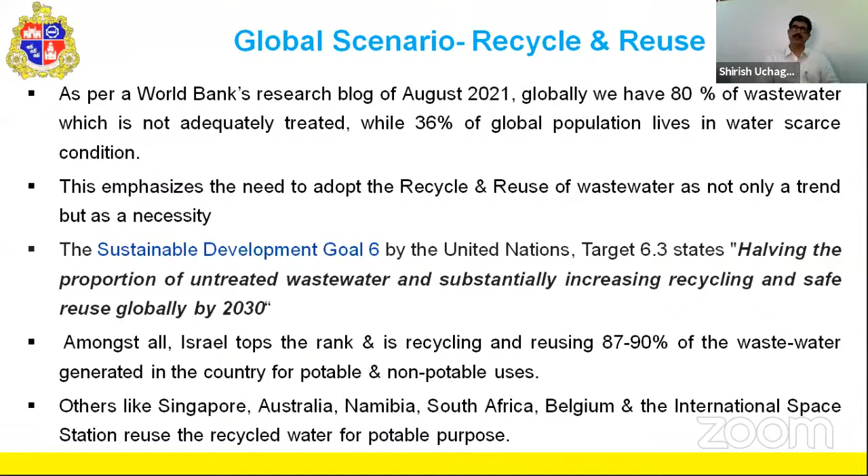While being on the subject for Mumbai, you may be aware that the population of Mumbai is around 14.08 million, and that's a major challenge that we need to tackle while speaking about recycling and reuse of treated sewage here.

The area Mumbai encompasses is about 438 square kilometers, and the water supply as of today is 3850 MLD at source. Now, deducting the supply given to, say, Thane Municipal Corporation as well as Bhiwandi Nagar Parishad and those areas...

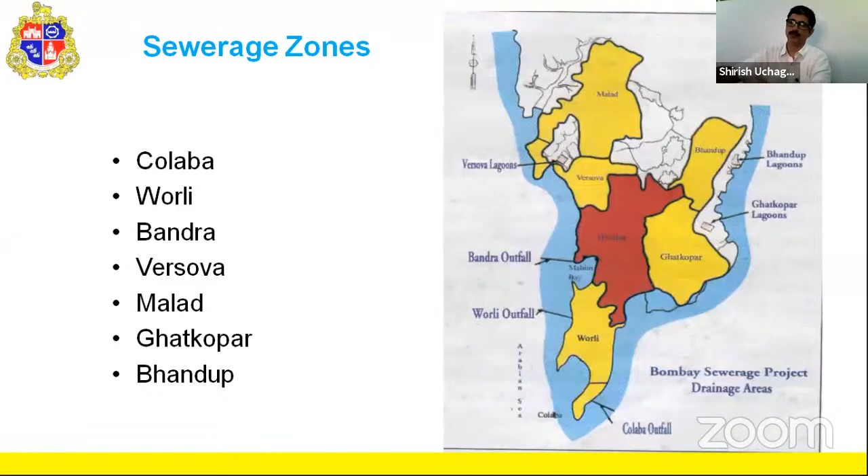Recently completed Colaba treatment plant has tertiary treatment facilities also, but since there is no user available immediately, the treated water is let into the sea after secondary treatment.

Of course, Navy has shown interest for buying this tertiary treated water from Colaba, but not to the fullest extent.

So we intend to reuse the treated water from wastewater treatment facilities in Mumbai, and through our department named Mumbai Sewage Disposal Project, we have invited tenders for upgradation of all these 7 treatment facilities, so that the treatment effluent discharge standards of NGT are met on completion of these treatment plants.

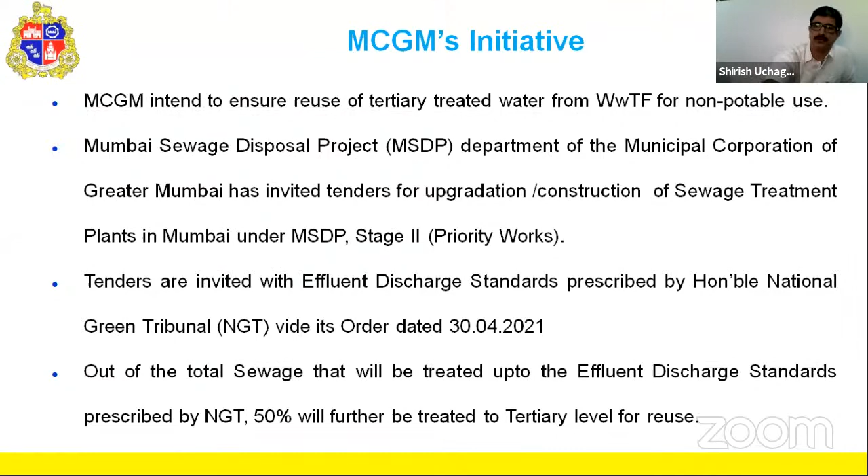The 7 treatment plants which I was discussing about earlier - Colaba is commissioned in April 2020. The other treatment plants which are going to come up have total capacity of about 2,501 MLD, out of which 50% of the water is going to be recycled and reused.

This additional water available after completion of these treatment plants will be treated at new discharge standards mandated by NGT. The bids invited encompass technology that is open to all — we have not specified any particular type of technology for treatment of sewage. All contracts are going to be of DBO type with O&M for 15 years, with due asset replacement after a specified time.

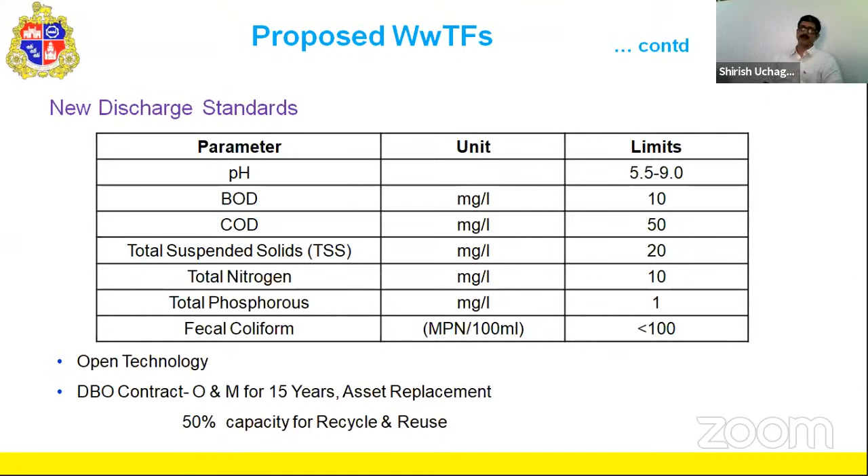Going back to the previous slide, you can see fecal coliforms indicated as less than 100 — that is after secondary treatment. But after tertiary treatment, they are going to be below detectable level. Then only that water is going to be used for non-potable purposes.

Now, about the non-potable uses of recycled water. We are exploring all these options where this can really be used, and the non-potable options could be industrial purpose, gardening, or charging of fire hydrants. This is one of the important uses which can be thought of, like charging of fire hydrants, railway or bus washing, or toilet flushing.

But for some of the uses, like toilet flushing given by commercial establishments or even domestic and residential establishments, we need to have some legislative support for that.

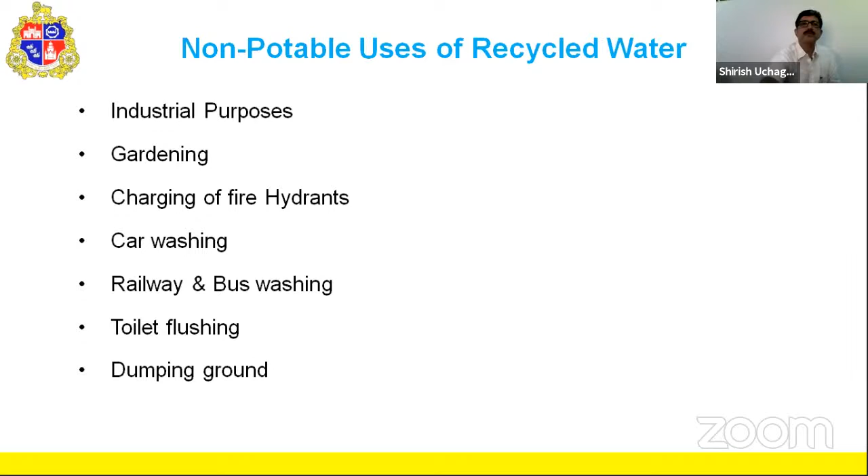We actually have some of these facilities erected at 8 locations where, with different technologies, we have been reusing treated sewage. Like from our Love Grove sewage treatment plant at Worli, by deploying the IIT soil biotechnology technique, we are using it for gardening purpose.

Now, the Banganga pumping station, which is based on rotating media biofilter technology, is administering the gardens of Raj Bhavan. Similarly, Bandra, Dadar, Charkop, and Colaba, though working with different technologies for treating sewage water, are being used for different purposes, primarily for gardening.

These are some of the challenges basically faced while framing policy on reuse of recycled water. First is maintenance of tertiary treatment facilities. This requires facility for tertiary treatment, not only from a capex point of view, but also for storage and delivery. It requires huge cost, and further, maintenance cost for ensuring proper water quality is also an issue while recycling treated sewage.

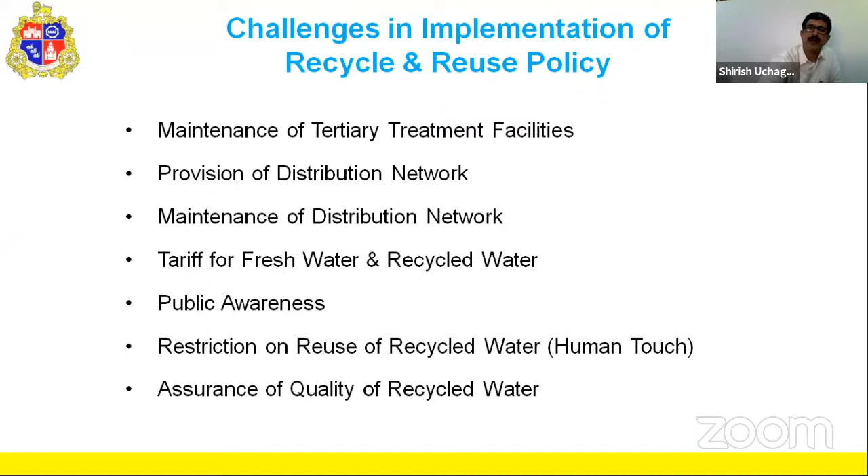Then we have another issue — tariff for fresh water versus recycled water. The most important part is public awareness. There will obviously be social stigma around using this water, so we need to conduct public awareness programs, along with legislative support and some mandatory marketing techniques.

So when these treatment plants were designed for treating wastewater at these 7 or 8 locations, what were the expected achievements of these projects? First was conservation of environment, because this will definitely help in reducing dependence on development of surface water sources. This will be a very reliable local source, not vulnerable to droughts or climate change constraints, so this has to be pushed further.

Secondly, it will also improve sea aquatic life, because we are letting our sewage — maybe preliminary treated sewage — through sewage outfalls into the sea. If it is treated fully and the water is reused, it will definitely improve sea aquatic life due to reduced pollution. This will also improve air quality as well as public health in Mumbai city.

But in spite of all this, we are facing multiple challenges while planning these wastewater treatment projects for such a mega city, and it is necessary to have a site-specific approach. If we are planning localized use of treated sewage, maybe after tertiary treatment, we need a localized network available for conveying, distributing, and storing that water at different locations.

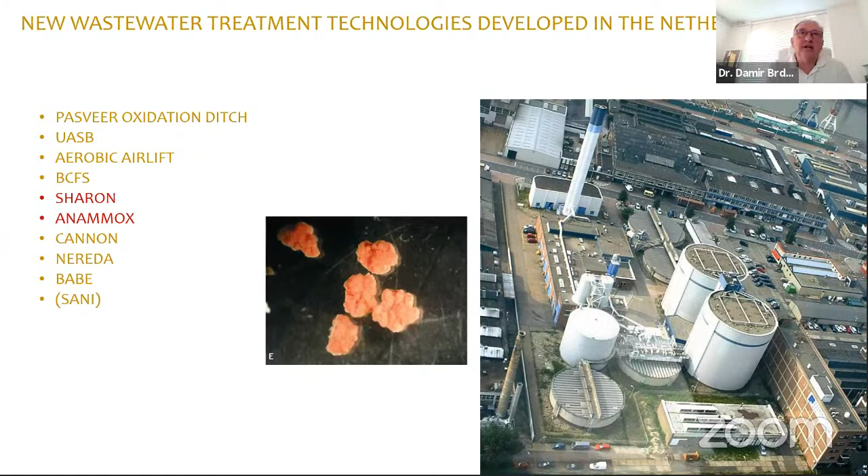So the innovation in that area was really pushed by Dutch wastewater practice and supported by the Dutch organization, the Dutch Association for Research in Wastewater, called STOWA. Such research was also behind the developments on aerobic granular sludge.

So now I'm not talking about anaerobic granular sludge, I'm talking about aerobic granular sludge, which was commercially patented and called Nereda, also available from one Dutch company. Nowadays there are more than 40 or 50 treatment plants in the world applying this process. The secret is the morphology of the microorganisms, which cluster in the form of granules.

Further on, there is also a process developed in Delft, but not necessarily globally applied. It's called BABE, which stands for bioaugmentation batch enhanced process. All these processes I mentioned - BCFS, Sharon, Anammox, Cannon, Nereda, and BABE - were co-developed at Delft University of Technology with Professor Mark van Loosdrecht behind them, along with a bigger team which often includes Dutch practice, Dutch water boards, and Dutch industry.

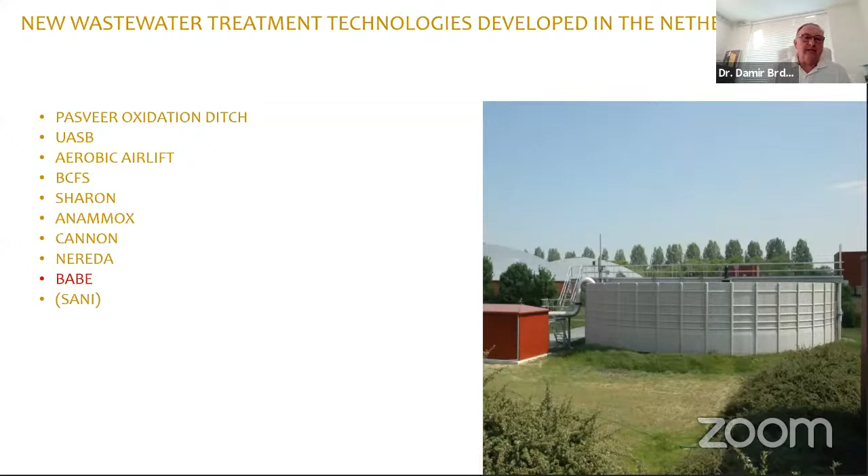The last wastewater treatment innovation from the Netherlands on my list is called SANI, which stands for Sulfate reduction Autotrophic Denitrification and Nitrification integrated. This means treatment of wastewater using sulfate present in the wastewater. I put it in brackets because the Dutch were heavily involved in this research, but the major developments were done in Hong Kong, China, where seawater is used for toilet flushing, which is why sulfate became important in treatment there.

Next to wastewater treatment, in the Netherlands we are very interested in resource recovery. We don't see wastewater as waste, but as a resource, and numerous systems have been developed to recover struvite from wastewater, specifically from urine. It's important that urine is separated from feces so we can efficiently recover struvite, which can later be used as a manure fertilizer for agriculture.

A lot of research in the Netherlands is happening in the area of bioplastics, and one example is the production of bioplastics from microorganisms in the form of PHA, which stands for polyhydroxyalkanoate. That is a booming industry.

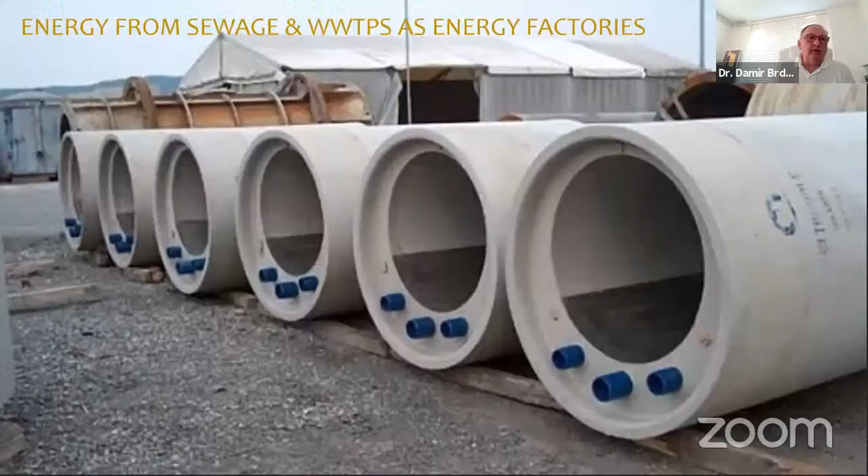As we heard earlier in Paul's introduction, energy recuperation from sewage is very important, and we have some examples in the Netherlands. In the last 10 years there's a new trend called wastewater treatment plants as energy factories. You may have also heard in a previous presentation that some wastewater treatment plants are energy neutral, and many recover enough energy to at least cover their aeration needs.

All of what I've said about the future of wastewater treatment plants, Professor van Loosdrecht and I put into a short article published in Science, and you can read more there if you're interested in this topic.

Now I'd like to move into the second part of my presentation, which deals with non-sewer sanitation: fecal sludge management, or as we discuss in India, is it fecal sludge or septic sludge? Don't worry, it's about non-sewer sanitation, fecal sludge treatment, and septic sludge treatment.

A big role in this development globally was played, and is still being played, by Bill Gates and the Bill and Melinda Gates Foundation, who launched an event called the Reinvent the Toilet Fair. Our King of the Netherlands, His Royal Highness, also joined this event, and I was there personally as an invited guest with wonderful chats. That event triggered the development of many new technologies for non-sewer sanitation.

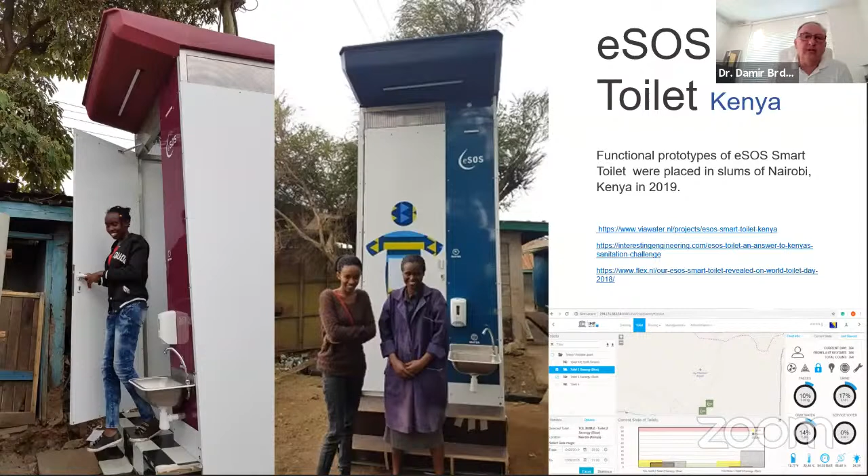So some results from this research inspired me and my team to think about how the toilets can be used for medical purposes. We wanted to merge sanitation development with medical technologies. So how could we use the toilets to detect diseases, not to diagnose, not to replace the role of the doctor, but to give a preliminary diagnosis of potential patients for several diseases.

And we developed a Mediloo toilet, one version of which is like this, which is actually a beautiful breakthrough technology still under development, and can be applied for detection, hopefully for at least a dozen different diseases happening in developing countries. Next to that, we also developed a concept called Mediloo Bathroom, which will bring these innovations also for the rich, because we are all people and we all need early detection.

So we are developing innovations from the mirror, where we have different technologies, from the smart toothbrush to the weight balance which is under the toilet and going into the toilet bowl. And we have technology and sensors everywhere, and they are all non-invasive. That's very important. So the approach here is to use technologies which are available and adapted to these innovations.

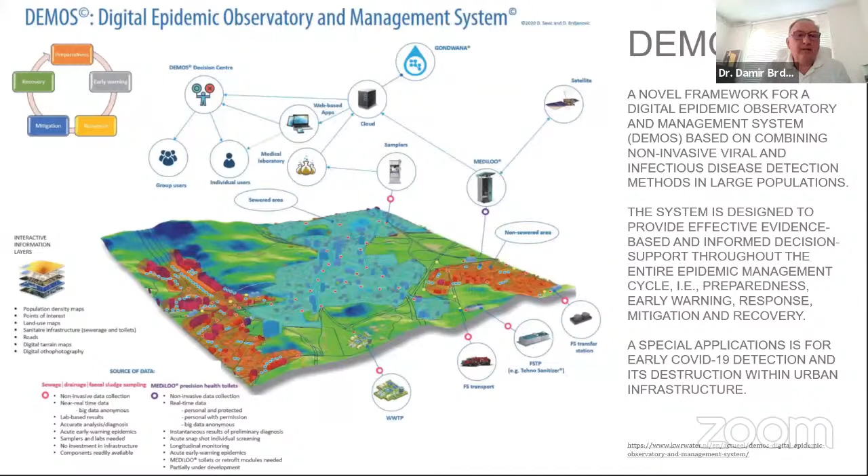And we are developing this in this direction very, very fast at the moment.

So the last part is about education. It will take me 2 minutes, please. It's about something extremely important, because these technologies that I showed you, where the Netherlands is paving the way already for decades, and is recognized as one of the most fertile countries in the world concerning wastewater, and nowadays also non-sewer sanitation, requires also people.

About 10 years ago, my institution, IHE Delft, put tremendous effort into improving our mission regarding sanitation. In this journey, the Bill and Melinda Gates Foundation helped us tremendously. With their help, we established a global sanitation graduate school.

This is the world's largest mechanism for capacity development in CWIS, citywide inclusive sanitation. At this moment, we are focusing on Sub-Saharan Africa and Southeast Asia.

What is the Global Sanitation Graduate School? It's actually an organization, a platform which takes as its basis the Delft-based new master's program on non-sewer sanitation that we developed in cooperation with 150 global experts on sanitation.

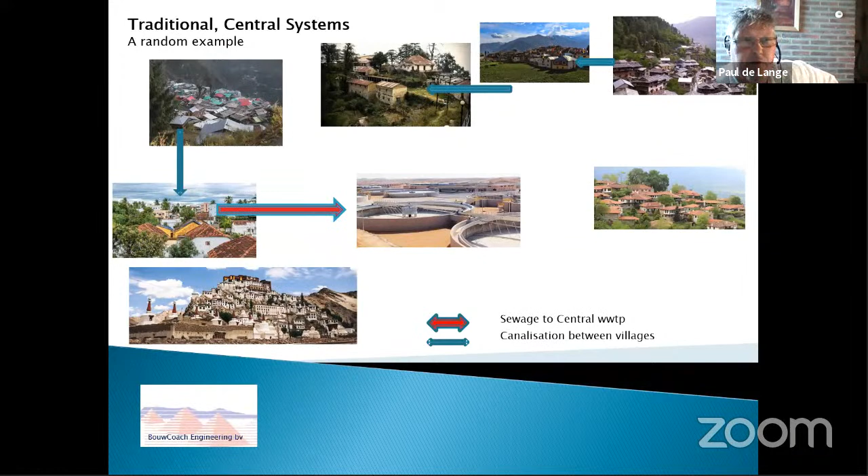Okay, this is my first sheet, just explaining a little bit - all of you know how traditional central systems work, and after that I will tell you about decentral systems. Let's see if the slide is working. Yes, okay. This is very logical how central systems work: you go from city to city with piping, ending up in a central wastewater treatment system.

It has some disadvantages. You need a lot of time to design - it's custom made, you need to design the piping and the wastewater treatment plant. Also, these plants only work well when 80% of the designed capacity is really going to that plant. When you're in a developing area, it can take years, so it won't work. Of course, in operational costs you also have pumping costs, energy costs, and all that piping, which is expensive to build. In a country like the Netherlands, we usually take 200 euros per meter of transport pipe - calculate what 10, 20, 50 kilometers will cost.

On the other hand, we have the decentral solutions. Here you see the same villages, but in every village you make a local plant. This way you avoid all the designing costs and piping costs and piping design costs, and you don't have a central solution anymore. A further advantage is you can locally reuse the effluent - you're not down the mountain, you're on the mountain.

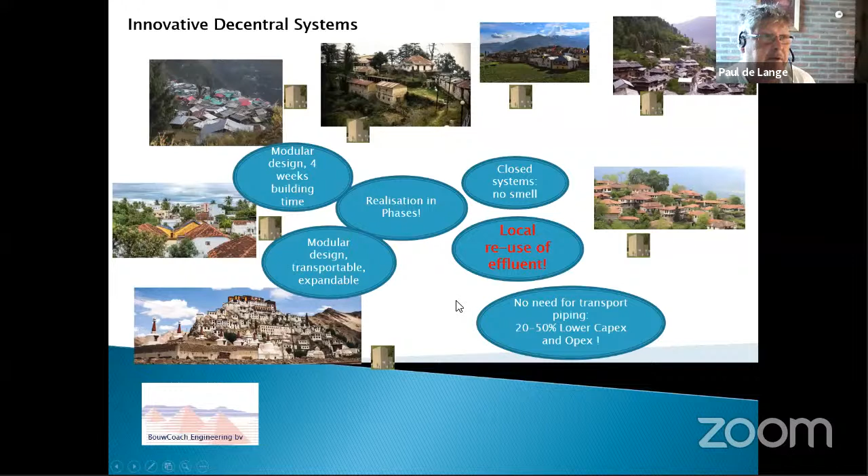One very interesting thing: one of the former speakers showed figures for what the effluent needs to be. When I quickly checked, I saw that our test results on the modular standard units are even much more below the minimum requirement, and even matching the reuse requirements. And that is even without the last part that we introduced in our systems.

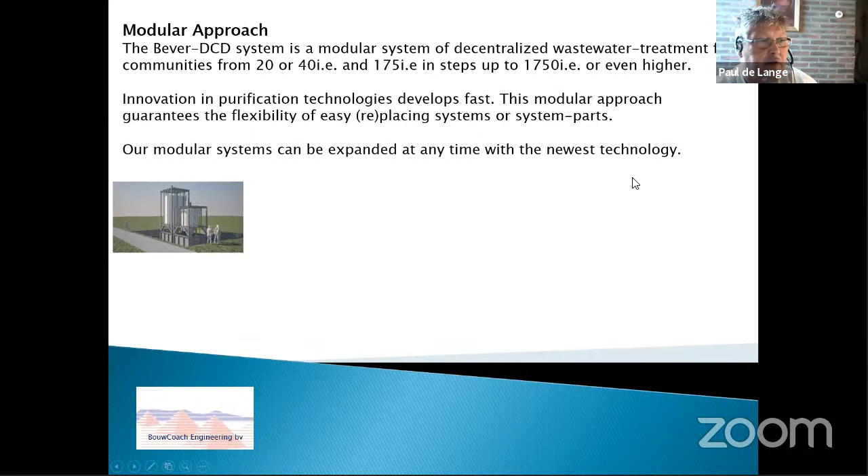Here you have some pictures, just examples, but you see the biggest tower is 175 IE. And that's the measurement of one modular size. And of course you can put a lot of them together. By the way, the surface of one element is about 4 by 4 meters.

So you can put them almost anywhere you want because they don't need a lot of space, due to the integration of the influent buffers and the sludge buffers. They're all in the cellars. So it doesn't need much space.

And for the very fast and small places, we have the modular container units. They are 20 or 40 inhabitant equivalents.

As you also can see, and it was mentioned before, that is the odor question. Well, as you can see, these are closed tanks, and the odor is very much controlled. And even with the second layer around it, the small building, you hardly have odor nuisance.

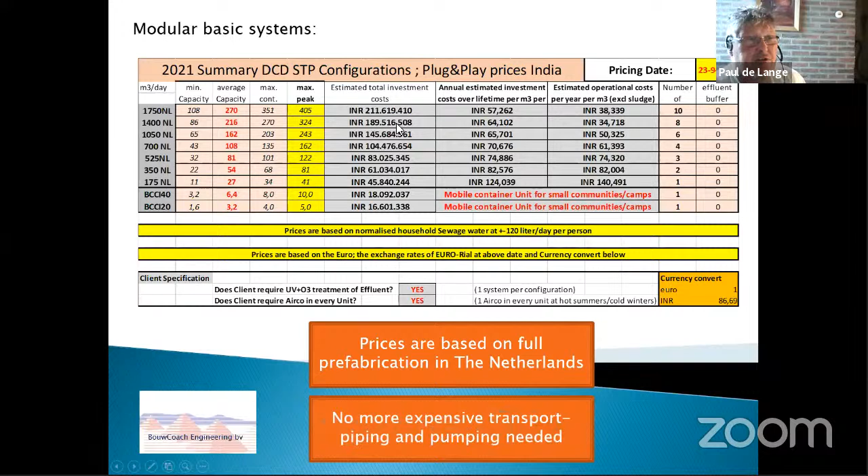Of course, this is a very important part, and that is: how much does it cost? Okay, we have the estimated costs here, and of course they are not fixed. But what you see here is fully prefabbed in Holland, transported to India, and erected on site. And there are a lot of alternatives for that.

We can make some parts in India, but also you see here the UV ozonification treatment is included. An aircon in every unit is included, that's only needed when the average temperatures go above 25 degrees. So, let's say, this is plug and play, usable everywhere in the world, giving very clean, almost potable effluent.

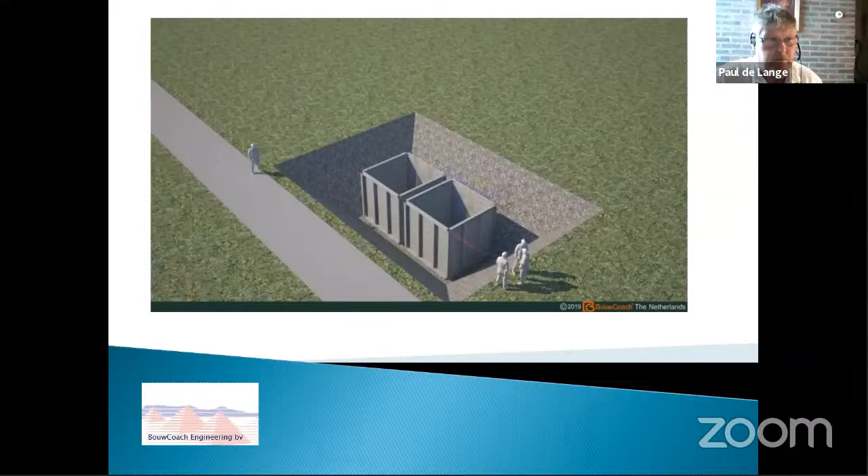Next, I will show you a small animation. This is the basis, to give you an idea how simple it is to place those elements everywhere you want. In this example you see it's in the ground, but as I said before, it's also possible to put them half in the ground or even totally above the ground. The only thing you need to do is fill the surroundings with sand, because when the tanks are empty and there is a storm, we don't want the towers to fall down. That's the only reason for it.

This is an impression. One of those tanks is the influent tank, and the other is the sludge tank, and they collect.

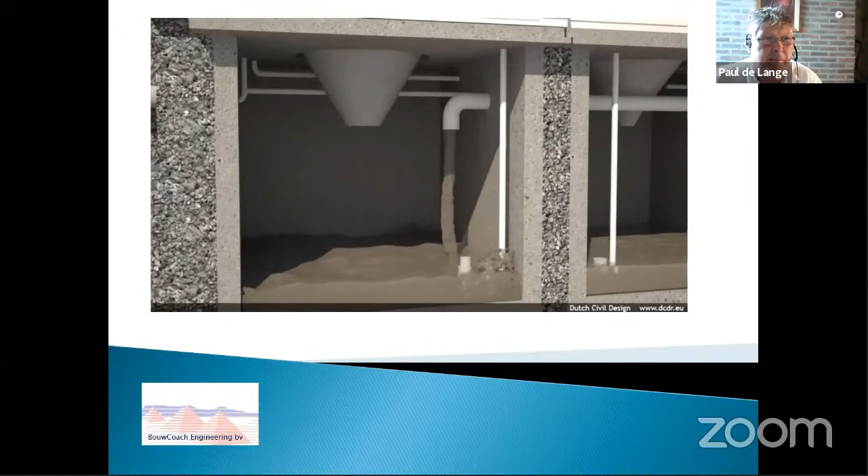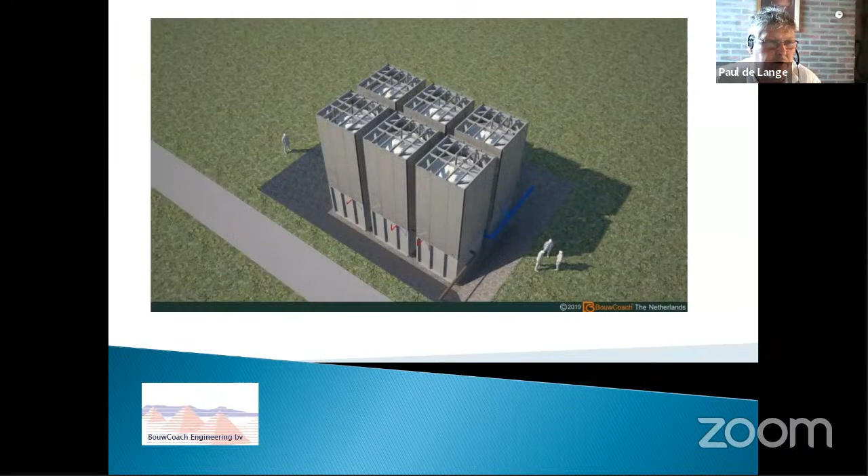Our systems are controlled and monitored by telemetry. Here in the Netherlands we have an office where all the data from the world comes in, and we can see if something is malfunctioning. Sometimes we can correct it from our Dutch base, and sometimes we need to send a maintenance engineer who can be instructed and can work for a regional water company.

Again, these towers are only 4 by 4 meters, so it's no problem to put them in suburbs, small villages, or in cities next to a building complex. So you can do your wastewater treatment very locally.

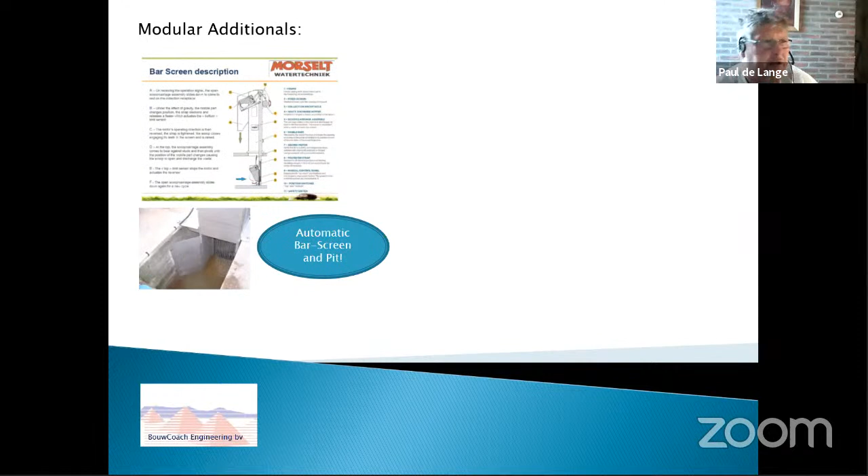We have some additionals. Of course, we don't know what quality or pollution is in the incoming water, so you can add an automatic bar screen. Also, if you have a remote area with a lot of those installations, we have a mobile dewatering unit, so you can take the sludge out, dewater it, put the water back into the system, and take the thickened sludge to a place where it will be processed. And what I mentioned before, already included, is the UV and ozonification disinfection unit.

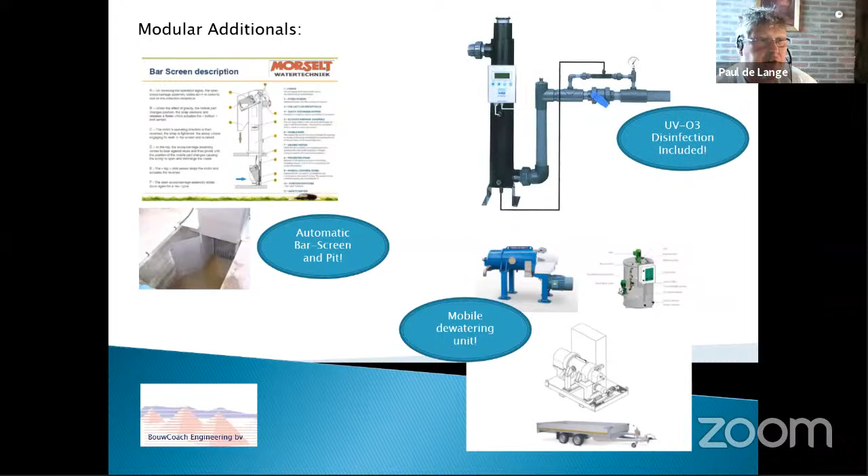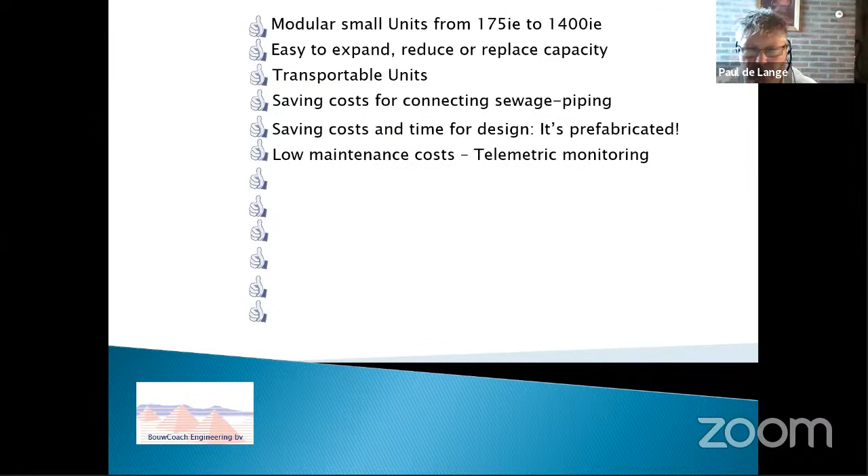Very quickly, I will not read all of them, but I'm sure you can read them afterwards. These are all the advantages in a row, and of course everything depends a lot on the prices. But always remember, if you want to start up a sanitation project, always look at the decentral solution before you go designing a big plant or a big transport system.

I'm very willing to give a quick price to anyone who wants to do some investigations or a feasibility study, because I'm very convinced that in many cases these systems are much more logical. And of course it's proven technology—you don't have to reinvent a custom-made, custom-designed central solution every time. It's proven technology and it's Dutch quality.

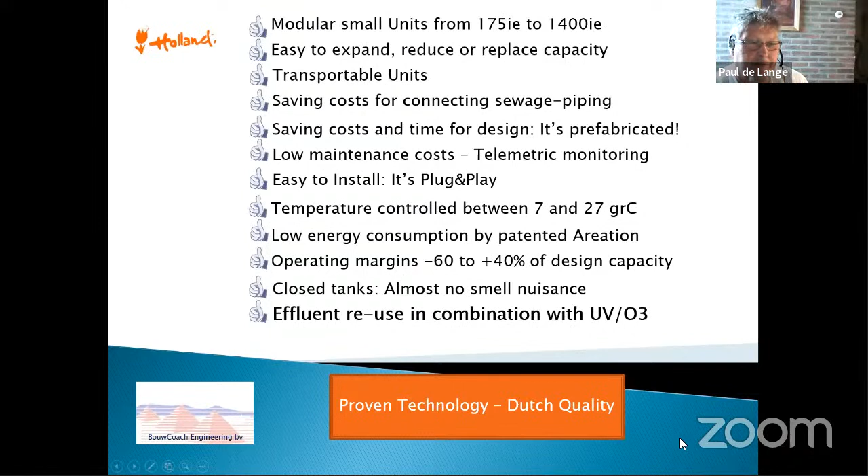And the question is, can you think differently and in your first plans already introduce these decentral solutions? If anyone has questions, please go ahead.

So Paul, we do have some questions for you. One, Prajakta Malve is asking: what is the capacity of these modular units? Can it handle the large quantities of wastewater that Indian cities generate?

I will go back to one of the pictures here. I hope everybody can see—or is it out? No, it's out, but okay, I'll share it again. Can you see now? Yes, I think so.

Here you can see the modularity. So this one tower is 175, and the average capacity is 27 cubic meters a day, maximum continuous 34, and we can handle a peak of 41 cubic meters. What you do is find the right amount of units to fulfill your needs. So a 1750 installation, that's 10 times the 175, has a peak maximum of 405 cubic meters a day. Of course you can double, triple, or multiply it by 10, but at a certain point you are going into a central solution, because that will be cheaper. It's basically as simple as that.

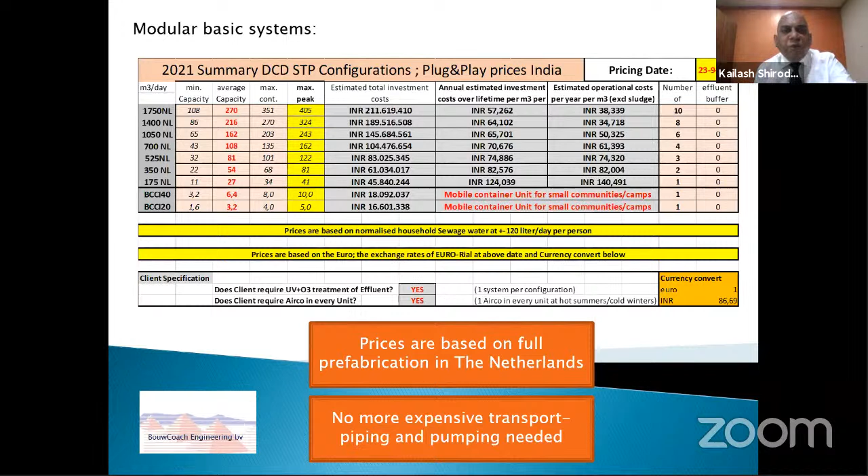So 2 or 3 viewers have asked this question, Paul: what technique or method have you used to calculate total nitrogen in the wastewater?

It was not a calculation. Of course we have calculations, but they are based on laboratory results. So we have three things: the calculations that were the basis, the laboratory measurements, and the in-practice measurements—and they fit together.

Yes, so with a pre-designed, proven technology, you can very much say what the performance will be. But I need to say, of course, you need to have a basis for your influent. If you have very polluted water with industrial components, you have to recalculate, and you have to see, okay, maybe we have to make it bigger than just with household wastewater. But basically, no.

If we know the amount of cubic meters a day, if we know how the influent is polluted with normal house water, or is there a lot of salt from factories, then it will be difficult. But we can give you an indication what it will cost, and we can give it within a few days. So I invite everybody who is interested, just mail me, and I'll make you a price indication.

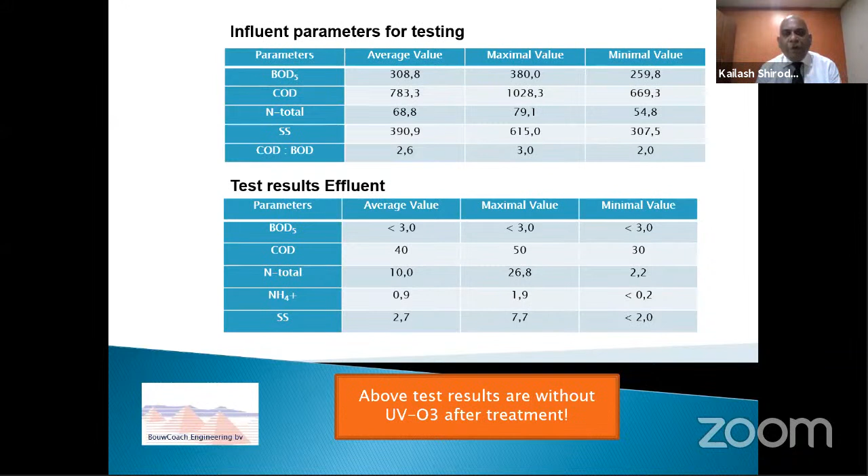Thank you, Paul. So moving on, like I shared with you, we are going to have in the next part of the webinar today, interesting case studies, both from the Dutch as well as India. So moving to our next presentation, I would now like to invite Mr. Davy Ringroot. He's going to be talking about case studies from Dutch utilities on the wastewater side, so specifically for the cities of Tilburg and Hengelo. So over to you, Davy.

Thank you, Kailash, and good afternoon, everyone. It's my pleasure to present on sludge treatment in the Netherlands and to present also some case studies from two projects that were realized in the Netherlands. Can you confirm you can see the screen, please, Kailash? Yes, we can. Very good, then here we go.

So I will present today a bit on the structure of the Dutch water market and very specifically on the role of the waterschappen, or water authorities, which is very typical for the Netherlands. And then I also will explain how sludge management is organized in the Netherlands. And then finally, I will present two case studies that were built in the Netherlands as an example of sludge management. And then I will also present some final conclusions.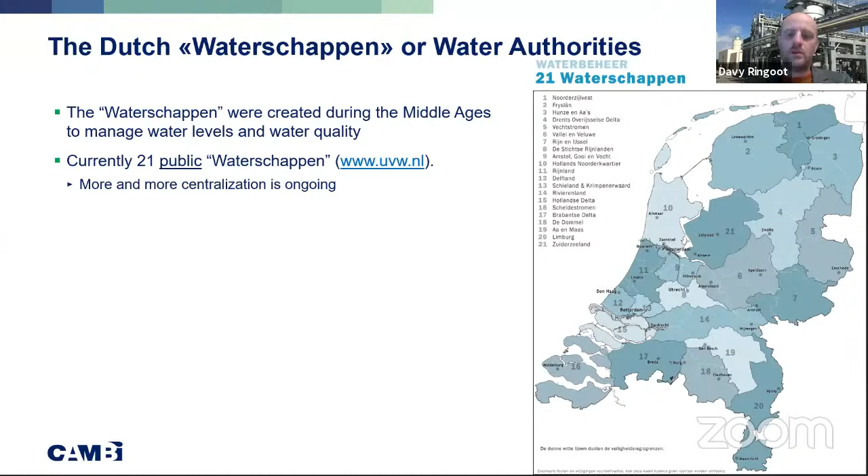What is very specific is that these are public organizations. So the water is managed through public organizations, but not in municipalities, in organizations that are much bigger than local municipalities. So all in all, in the Netherlands, these waterschappen manage water for approximately 17 million people. That's the amount of inhabitants in the Netherlands, although that is probably less than the whole of Mumbai, I understand.

In total, the waterschappen own and operate approximately a bit over 300 large wastewater treatment plants. They treat about 2 billion cubic meters of wastewater per year. They also manage other aspects of water, but I will not focus on that today. What is really important is that these waterschappen have a very big focus on innovation, and that is, I think, one of the key drivers for the success of the Dutch water sector.

Professor Damir presented a lot of innovations in the Netherlands, and I think that many of these innovations have seen the light thanks to this innovative way of organizing tenders and projects by the end customers, which are the public water authorities. They also have defined within the 21 water authorities the goal to become energy neutral in 2025, and that has actually stimulated a lot of new ideas and new projects.

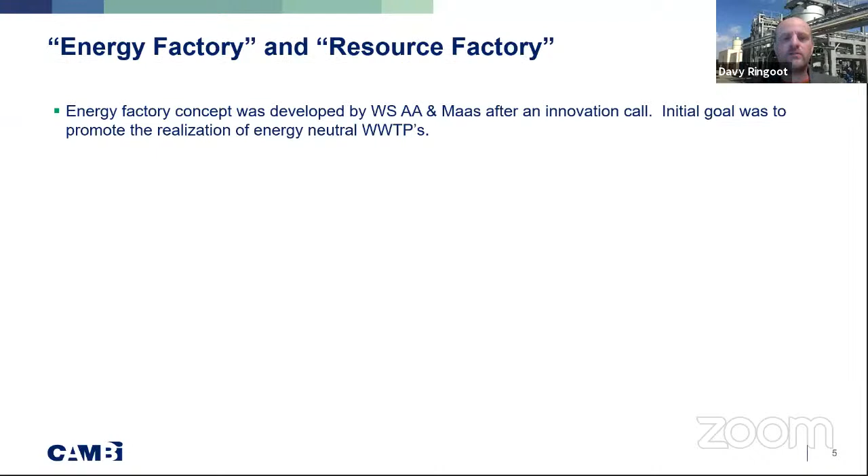Several other water authorities signed up for the idea, but it was also expanded, not just recovering energy, but also recovering a lot of additional resources, such as cellulose and phosphate. Struvite was presented also earlier today, but today there are also plants that recover CO2 and supply it from a wastewater treatment plant to one of the greenhouses in the Netherlands. Kaumera is a kind of biochemical that is recovered from Nereda sludge. So there is a lot of ideas and projects to recover energy and resources from water and sludge, and I'm presenting some results.

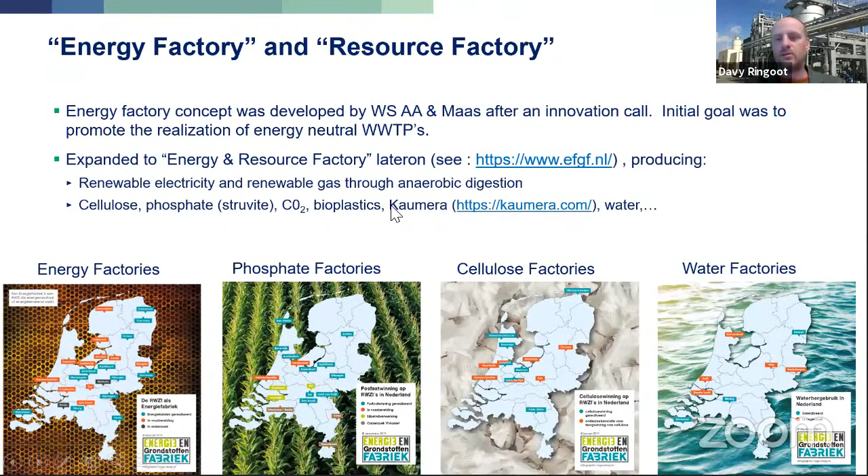This is kind of an overview in these graphs of all the different energy factories that are being built and developed in the Netherlands. You also have phosphate factories, cellulose factories, water factories, etc. So a huge amount of activity in the Netherlands. If you want to see details on all these projects, I recommend you visit the site of the Energy and Resource Factory project, which I've given the link here, and you will find all details on those projects.

So some words on sludge management in the Netherlands. As I said, there's approximately 17 million people in the Netherlands, and the total volume of sludge generated by these 17 million people, knowing that almost all sewage in the Netherlands is collected and treated, so there is a very high degree of connection and treatment. Overall, there is approximately 1.4 million tons of dewatered sewage cake that is being produced from the individual wastewater treatment plants. This is mostly digested sludge.

So these amounts are after digestion. These are the amounts that are sent to some kind of final disposal. And in the 1.4 million tons of wet cake, this is the water cake, it represents approximately 320,000 tons of dry solids per year that are disposed.

In terms of disposal, all the sludge in the Netherlands is disposed through some kind of incineration. Actually, the law is written in a way that sludge has to be incinerated. So there is no allowance, for instance, for composting of sludge or land application. This is driven by a number of reasons, but I think one of the main reasons is that in the Netherlands, or actually in the whole Benelux region, the whole area is already overloaded with nutrients. So we have very high levels of phosphorus in the soil and in the groundwater, and our governments are trying to reduce the amount of nutrients that are being put on land.

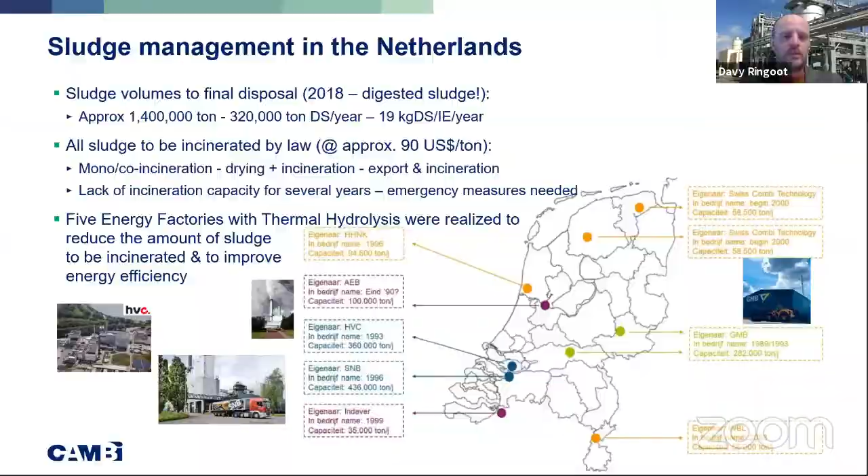So first one is the energy factory in Hengelo. Hengelo is a plant owned by the Waterschap Vechtstromen, on the eastern side of the Netherlands, close to the German border. The water authority manages water for approximately 800,000 people equivalent.

The business case of the Hengelo plant was to realize one centralized sludge treatment facility for all the sludge in the region. Historically this water authority had different sites, but they decided to centralize everything at Hengelo. Hengelo is a 200,000 people equivalent wastewater treatment plant, but it now treats the sludge for 800,000 people equivalent, which allowed them to maximize the existing assets.

At the bottom of the picture you see three large egg-shaped digesters, and by retrofitting them with thermal hydrolysis, the capacity of these digesters can be tripled, which allowed the plant to realize this centralized sludge treatment facility. It also allowed them to shut down one of the other digester plants at Enschede, which without this project would have required a complete rebuild and refurbishment. So they saved some money in the refurbishment.

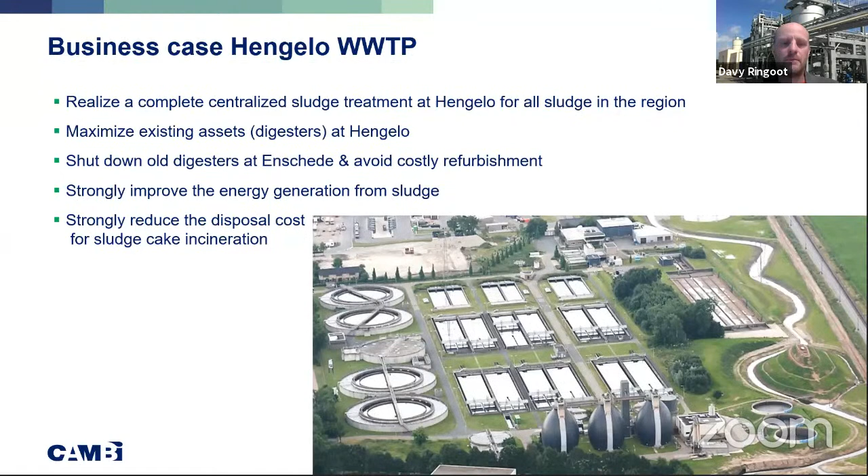In terms of solution, a centralized sludge treatment facility was built for approximately 18,000 tons of dry solids per year. About 25 to 30 percent of this is primary sludge, the rest is biological sludge. A Cambi thermal hydrolysis system was installed on site with all the ancillaries. What's interesting to mention is that this was contracted directly between the Waterschap and the technology supplier based on an open negotiation tender. Again, the goal was to maximize the use of the existing assets, the large digesters.

Two megawatts of renewable electricity generation was installed through three cogeneration engines. The dewatering was strongly improved by application of the thermal hydrolysis, dewatering now to above 30%. Also, one Anammox system was added to manage the reject water treatment from the sludge digestion.

So on the bottom picture you see the plant as it's been realized today. From right to left, you can see a building with the pre-dewatering machinery. Then there is a thermal hydrolysis plant with two hydrolysis reactors, a building with the boiler infrastructure, and finally three gas engines to produce electricity. You see the gas balloon and the flare, and all the way to the left is the Anammox plant that removes the ammonia from the reject water.

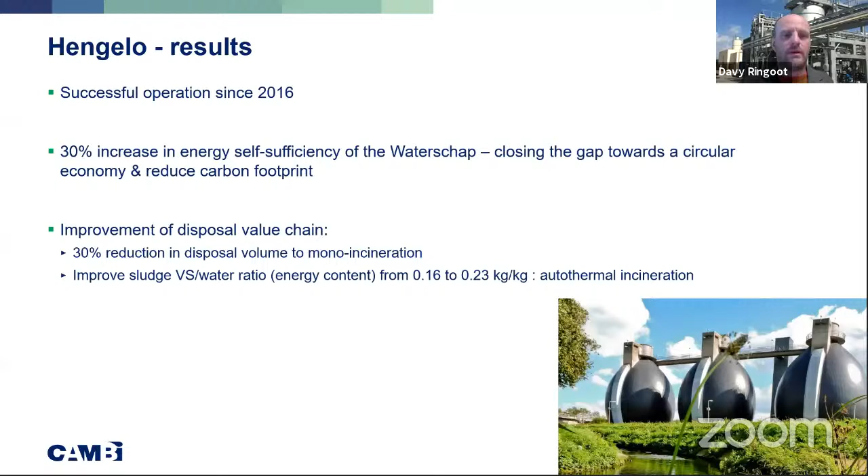In terms of results, this plant has been in successful operation since 2016. The project allowed the customer, the water authority, to increase their energy self-sufficiency by 30%, closing their gap towards a circular economy. The aim is for all the waterschappen to become energy neutral by 2025, and these projects contribute massively to that goal. It also provides an improvement not just for the waterschap, but throughout the whole value chain of sludge management.

It allowed for a strong reduction in disposal volumes towards the mono incineration plant, but more importantly, the ratio of organics to water in the remaining sludge was improved. So there is more organics compared to water, which improves the incineration properties of the sludge, allowing autothermal incineration of the remaining sludge. This improves the situation for the water authority, but also improves the situation at the incineration plant.

Finally, and of course also very important, the investment was financially attractive to the customer. They had to make an investment in this centralized facility, so there was a net investment in Hengelo minus the savings in Enschede. There was a saving in operational expenses of about 2 million dollars per year, and that calculates to a payback of approximately 8 years.

Then a second project, quite similar but for another waterschap in the Netherlands, now for waterschap de Dommel. Maybe you have 2 more minutes? Okay, 2 more minutes, then I have to go through quickly.

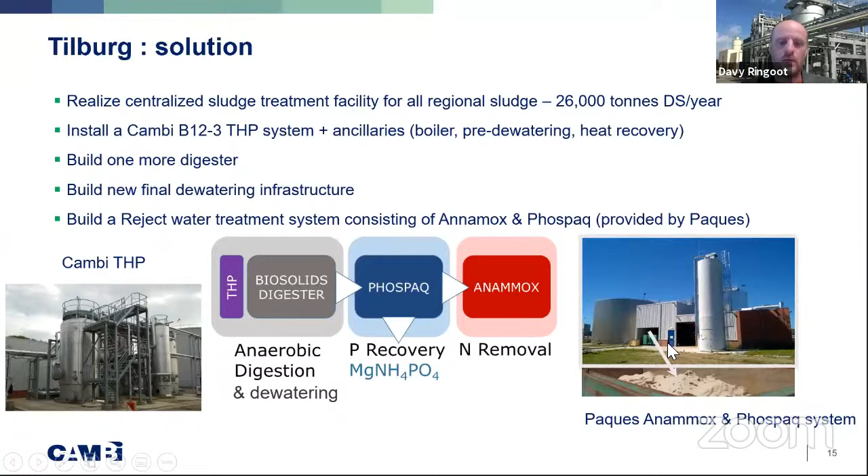In terms of results, the plant has been in operation since 2016, producing a lot of biogas for CHP and gas upgrading, reducing sludge amounts, and improving, like in Hengelo, the incineration efficiency. I should mention that the struvite recovery in this plant is not fully in operation.

Finally, based on what I presented, some conclusions. The Dutch structure of waterschappen is quite special and important because it allows for a centralized vision on the management of sludge and water instead of a local focus. So they are able to look at the bigger picture.

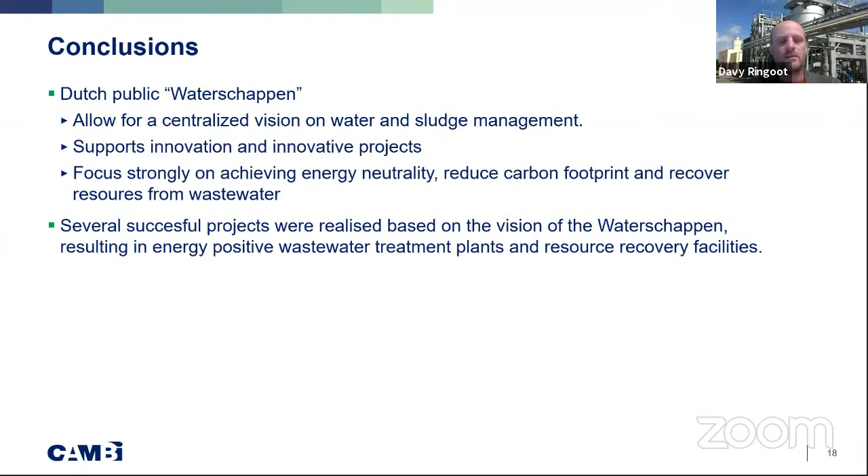The waterschappen are also very supportive towards innovation, and they now have this goal to achieve energy neutrality, reduce their carbon footprint, and recover resources. So several successful projects were realized based on this vision. I presented 2 examples of that.

I think the message from the Netherlands and from these projects is that selecting the right technology and having a master plan for sludge management is extremely important. With that master plan, you can select the right technology for a future-proof plant with low OPEX and low carbon footprint. We also suggest that close involvement of key technology providers is really important to get a successful project. And with that, I end my presentation and open the floor for questions.

Thank you, Davy, for this wonderful presentation. I'll check the Q&A box and chat for questions. One question coming up: you mentioned the Tilburg and Hengelo case studies, but how would you recommend THP as a solution to the ever-increasing problems Indian cities face around their sludge management issues? I'm not sure there is any THP solution in India currently, though I'm aware of multiple corporations that are evaluating them.

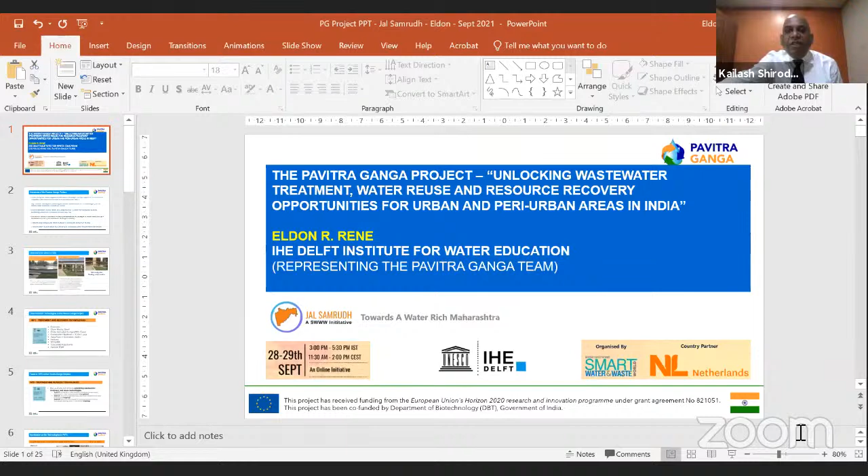Thank you so much, Kailash, and thanks for this nice introduction. I will be sharing my screen now. Can you see? Yeah, we can see you. Can you make it full screen, Eldon? Just click on from beginning. Yes. The slideshow, you can just click on from beginning.

I'm not able to see that. To your left, you can see from beginning on the left. Yeah, yeah.

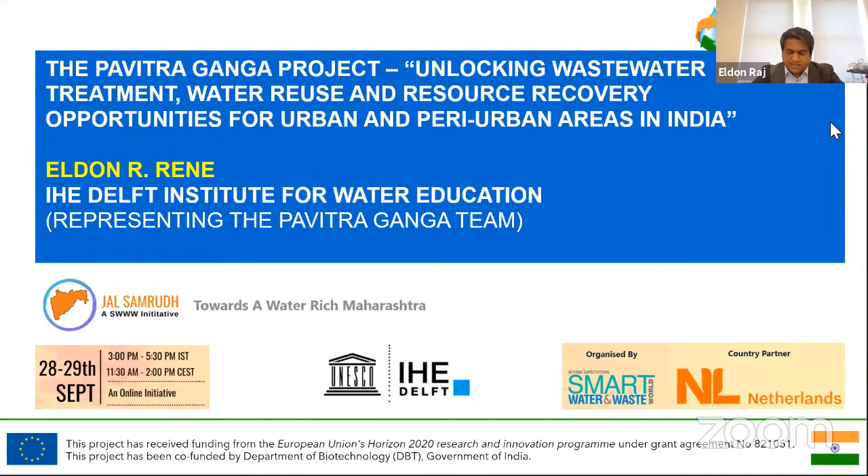It also focuses on opportunities for urban and peri-urban areas in India. This is a joint effort by 14 partner institutes from the EU and India, and it has a lot of ambitions, which lead to demonstration of innovative technologies applied in both India and the EU.

These are some of the specific objectives of the Pavitra Ganga project: to create a policy and social support mechanism for these innovative technologies, and to map, evaluate, and improve promising wastewater treatment and reuse technologies by considering local conditions. This is one of the criteria of the project, that we have to demonstrate something at the drains, simulating real conditions.

There is also a work package dealing with quality and quantity monitoring, control, and management of water resources. The focus of today's presentation will be on selected innovative technologies for real wastewater challenges in the Indian setting, at two of the demonstration sites.

These sites are, one in New Delhi and the other in Kanpur. As with any of these proposals, we also aim at capacity building, knowledge sharing, and a lot of innovation in demonstration and dissemination activities.

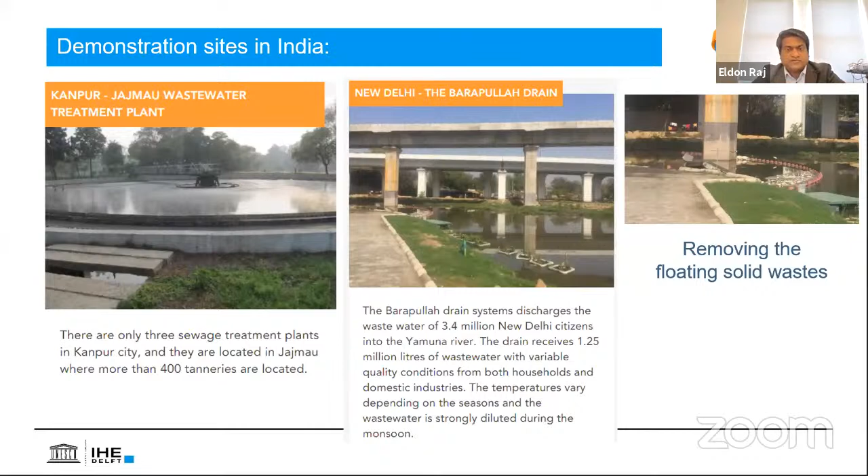Then of course it has a lot of suspended solids, and it depends on the technology what we are going to apply, so we do this primary treatment.

We cannot cover all this, so I will cover a few of them here. Before we go on, each of these work packages is also divided into sub-tasks. There are 3 tasks in this work package.

The first task was to identify the boundary conditions for technology development under Indian conditions. If we want to implement something that considers local situations, we need a lot of data sharing on water quality criteria, water quality indices, and of course the discharge standards.

In task 2, it was about laboratory experiments for different types of wastewater and also the reuse technologies.

In this task, we also focused on resource recovery as a possibility, because it's not only about treatment, it's also at the same time looking at the possible resources that can be recovered from different technology. For example, it can be in the form of methane, platform chemicals, or nutrients. In our case, because we used an algal bacterial bioreactor, we were looking more at the lipid content.

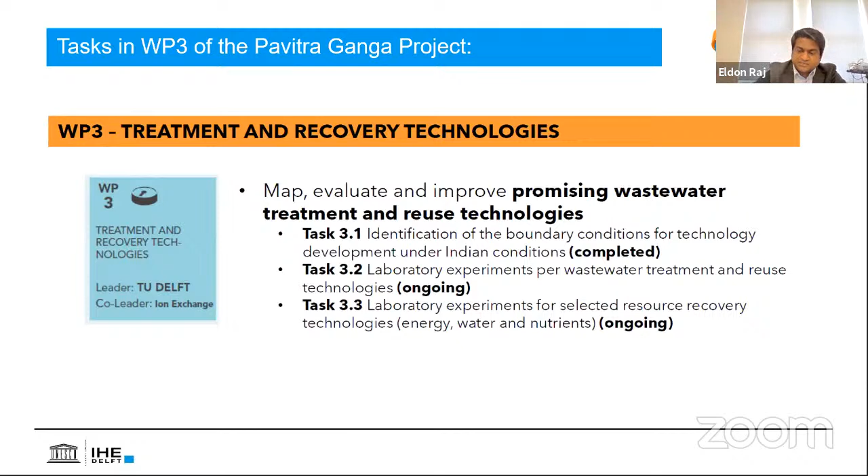The first technology I wanted to show here is what we call clean blocks. These clean blocks are nothing but special blocks of material, as you can see here, that are cubes. They are produced from mineral wool, or can also be produced from different materials, depending on the locally available conditions. These blocks offer very high porosity.

They are normally used to treat the water by biological activity within the material. Once you have high porosity, you'll obviously have a very good facility for biofilm growth. With this biofilm, we can achieve nutrient removal, and in many cases it will also act as a pre-treatment step for further technologies, removing suspended solids. From a resource recovery viewpoint, the group based in TU Delft, with Steve, is now also looking at this.

They're also looking at how struvite can be recovered from the Barapullah drain water.

There are different aspects that have been used, and you can see how it would look in practice if we really apply that. These are basically like filters, which are not just physical filters, but also have biological activity. They had done a lot of experiments at different flow velocities and different filter lengths, and there are some interesting results that have been achieved now.

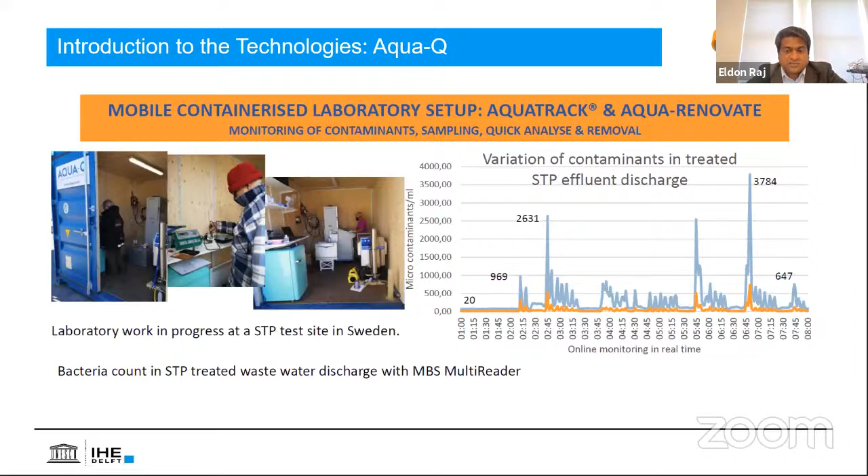One of the biggest problems with the Barapullah drain, at least as I know it, is the monsoon time. You will have a lot of excess water coming in, so that is also something that has to be taken into account. These flow variations and diurnal fluctuations have to be monitored.

The third technology I want to mention is an aerobic MBR system. This system was also developed by my colleague from TU Delft, and it combines the advantages of a conventional activated sludge system along with the operational advantages of a membrane bioreactor.

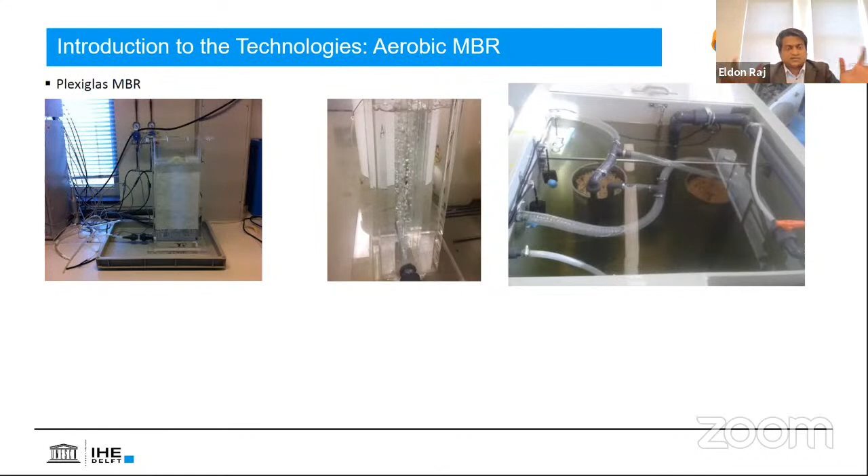Before that, at the lab scale, we did some experiments, but I'm not able to show those results here. I will share the link of the whole project, where you can find a lot of details and contact the work package leaders as well as individual members from different organizations.

Okay, and Eldon, you have 2 more minutes. Yes, and the technology we developed here is called PSBR, a photo sequencing batch reactor, which combines the advantages of a sequencing batch reactor and a photobioreactor.

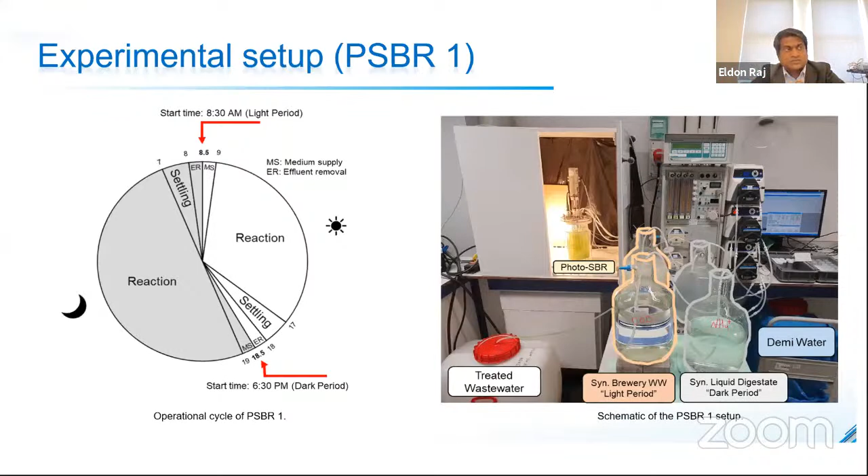We operated 2 bioreactors by varying the cycle length, taking advantage of the light and dark cycle periods of operation. In one reactor, we passed carbon during the light cycle and nitrogen during the night cycle, to induce stress on the algal photobioreactor. In the second system, we combined both carbon and nitrogen wastewater, passed in both cycles of operation.

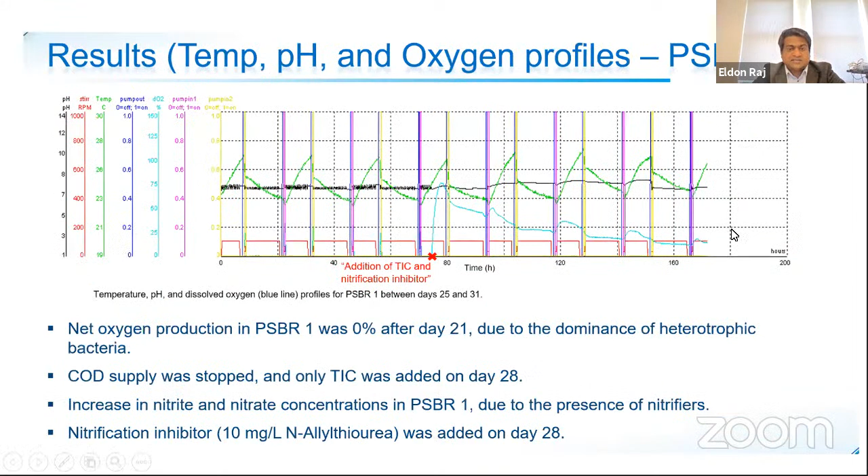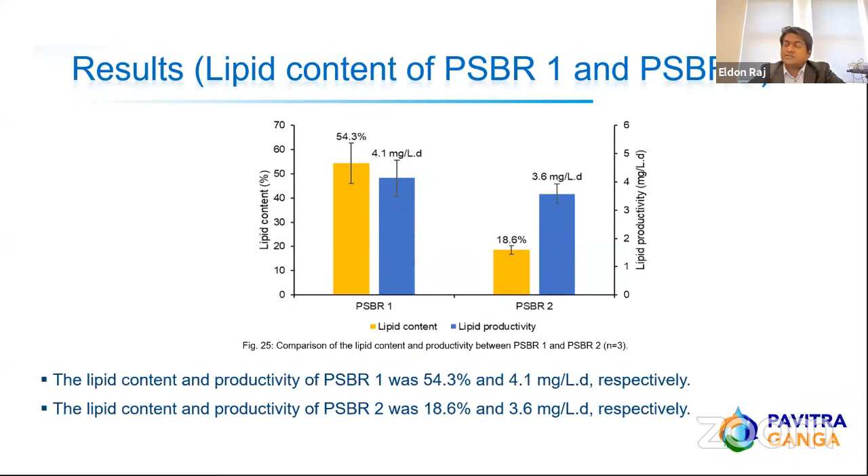We divided this into different phases with some very interesting results, and we were also able to demonstrate high lipid productivity. The next step for the demonstration is to go further, to see if this algal growth can be harvested to get nutraceutical compounds, from a resource recovery platform chemical viewpoint.

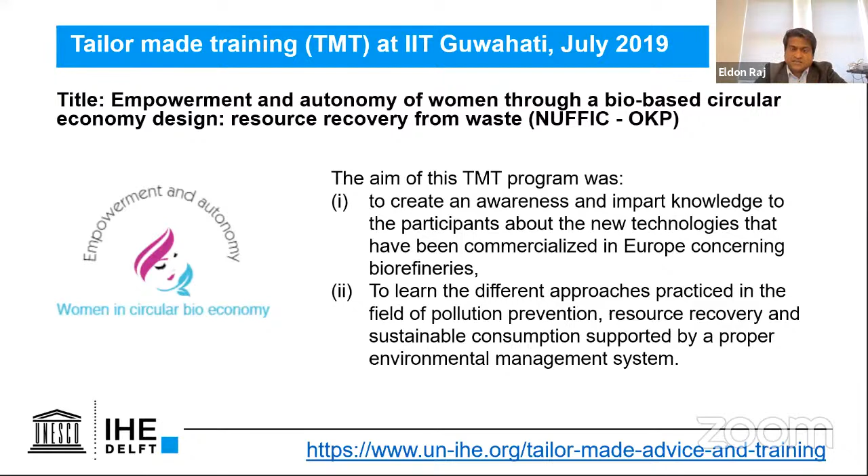We have also conducted several tailor-made training programs as part of our activity at IHE Delft. This was done with IIT Guwahati on women empowerment and the autonomy of women through a bio-based circular economy, which we did in 2019 in Guwahati.

I would like to say we have a few upcoming events in India. In 2022 and 2023, we are planning 6 workshops on the decision support system, safety planning for water reuse, benchmarking different quality, and the use of mobile monitoring solutions. There are a whole set of nice deliverables, and we are planning similar workshops, but not online - hopefully in 2022-23 we will have this face-to-face in India, as one of the deliverables of the project.

Okay, so with that, I would like to thank you all for your kind attention. And if there are questions, I would like to take the question.

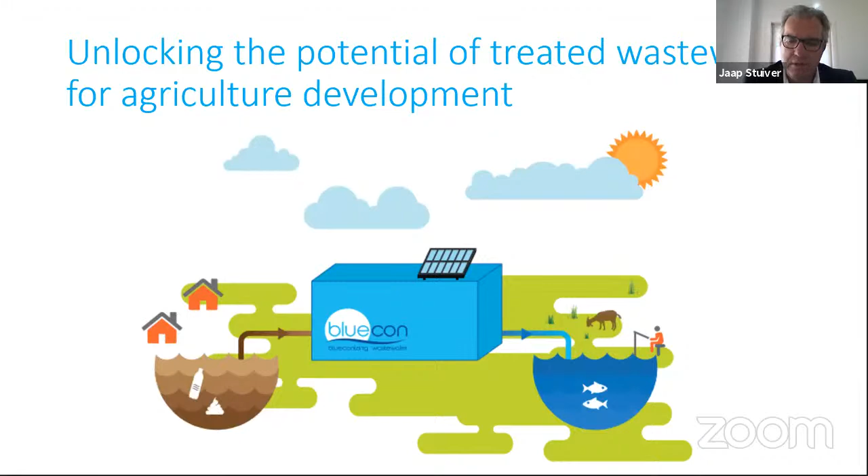So that's why we have made a unit for demonstrations, and in the last 4 years we have done a lot of demonstrations in Chennai, for example 1 year ago, and also in Chile and in Morocco. And the results were astonishing.

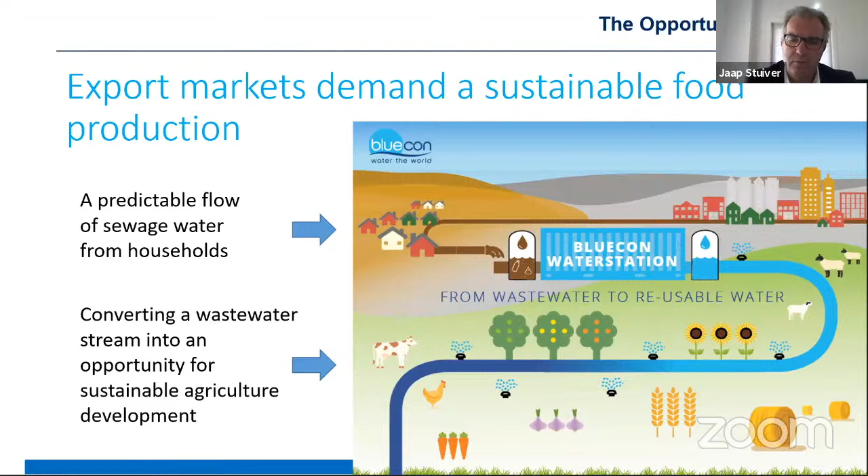What we want to do is treat the wastewater to meet present regulations for reusing the water for agricultural use. In our process, we are talking about a capacity of 1 MLD per day.

There are only two resulting effluents: clean water and primary sludge. It's not digested sludge, so it's primary sludge, because we are using a physical treatment system. That physical treatment system is based on coagulation and flocculation.

We do this in such an enhanced way that we are able to remove all the most important contaminations in the first step. After the first step, we filtrate at 70 micron to remove all the floating particles, and then we have the last polishing step for disinfection and oxidation.

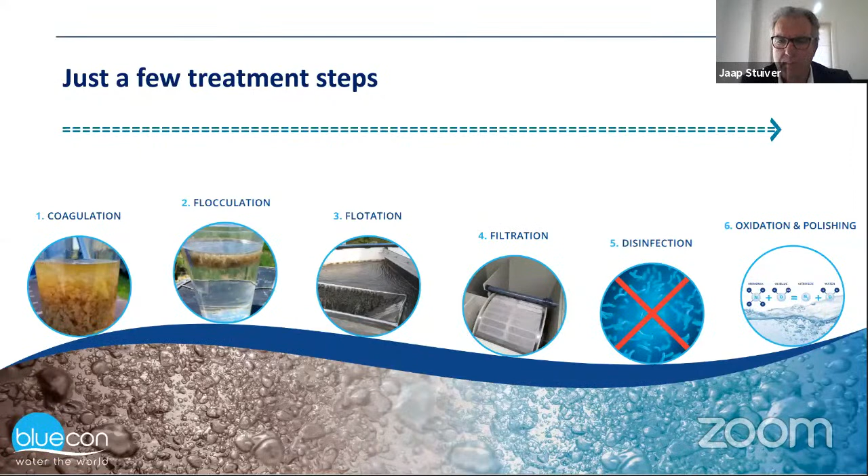This removes nitrogen, and also removes extra COD and BOD. Because of the new regulations in India, we see that the COD level must be below 50 milligrams per liter, and with our last polishing step, we can achieve that.

What is the big advantage of our system? Instead of big, large infrastructural systems, we are installing these units into standard sea containers, which can be installed in approximately a few days. It is a plug and play situation, so it can run directly.

This is a sample design of one of the units we want to build in India, because at this moment we are talking with the government of Tamil Nadu together with our partner over there, Masaqua in Chennai, to build these units in India. It will create a lot of economy, but also a lot of employability, and that is very important for the Indian situation.

We only deliver the software from the Netherlands, and the rest can be built locally. This unit, a 40-foot container, is good for approximately 1 MLD per day.

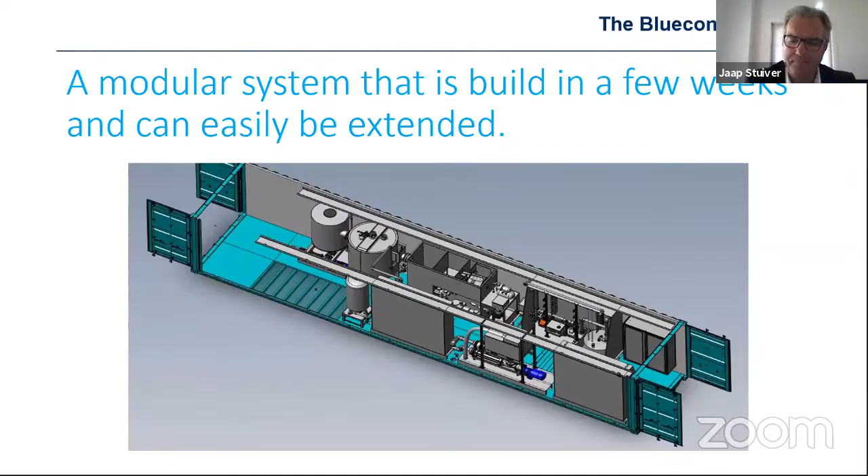What is also very important is that because we have a physical treatment system, there is no secondary sludge. So the quantity of sludge is almost one-third below the normal situation.

It's completely automatically controlled, so the operator can be low educated. It is a stop and go system, so if there is an electrical failure, it will stop automatically and start up again after the electricity is put back on.

You don't need a big investment because, as Paul de Lange of Bouwgroep already said, you don't need any extra pipes because you can put it decentral.

Last year, we did a large demonstration of almost 2 months at the pumping station in the city of Chennai. A lot of people came there and saw how simple it is to start the unit and operate it - you press a button and everything works directly.

This is in the container. It's easy to operate. It's a very robust system. We have been running it for almost 4 years now.

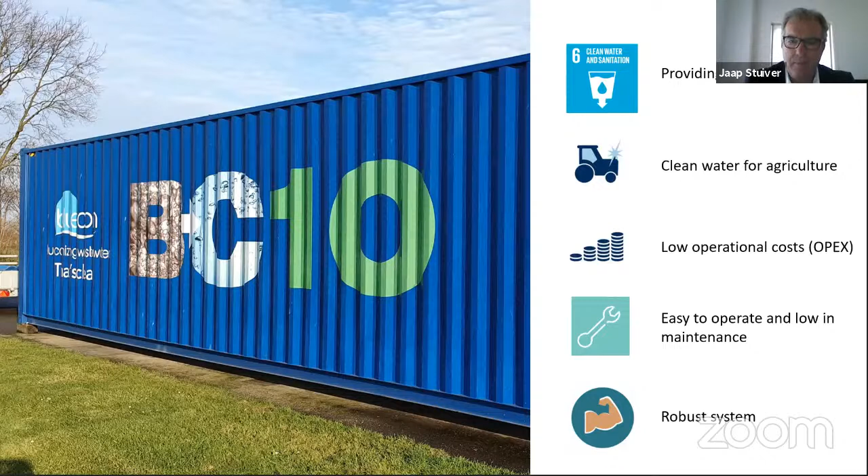So all the child diseases are removed, and we are now implementing these units in Romania, Serbia, and Chile. You will see here some photos of the demonstrations.

If you want more information, technical information, or analysis, please contact me and I will send you all the documentation, together with our partner in India, Masakwa, who will help you and sort out all the questions.

Thank you, Jaap, for this brief presentation. I'm sure that people in India would be interested in exploring this particular technology.

Yes, I can understand that. As you've seen, we have already done a demonstration over there, and the local authorities did a lot of analysis, and we are confident that we can fulfill the new norms over there.

So we will definitely share this with all the viewers who are viewing it today. I'm sure your contact details, being in the slide, they could touch base with you directly on this. Yeah, they can email me and I will answer together with all my partners over there all the questions.

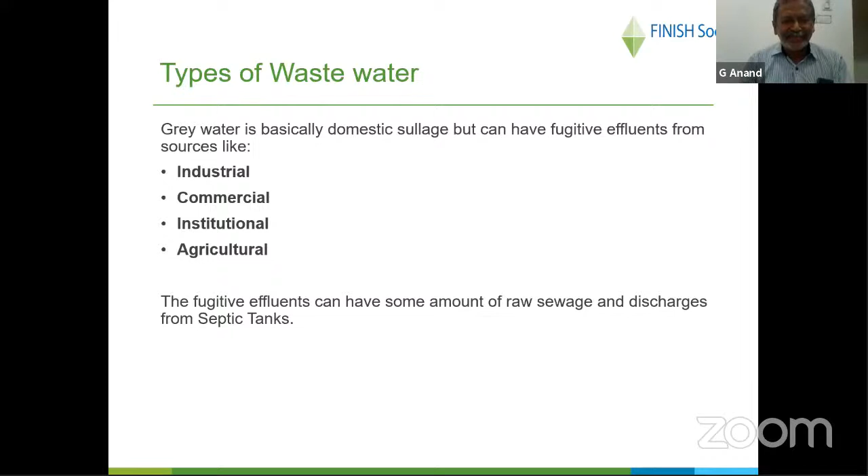So each drain has a characteristic of its own. The flow pattern will be different, the flow rates will be different, and characteristics will differ based on the sources of effluent coming in. Because of that, the treatment systems also have to vary even for the same end use. Basically, we have to look at properties like BOD, COD, dissolved oxygen, and of course the bacteriological quality too. The degree of treatment required is primarily based on the end use, not just the characteristics of what is coming in.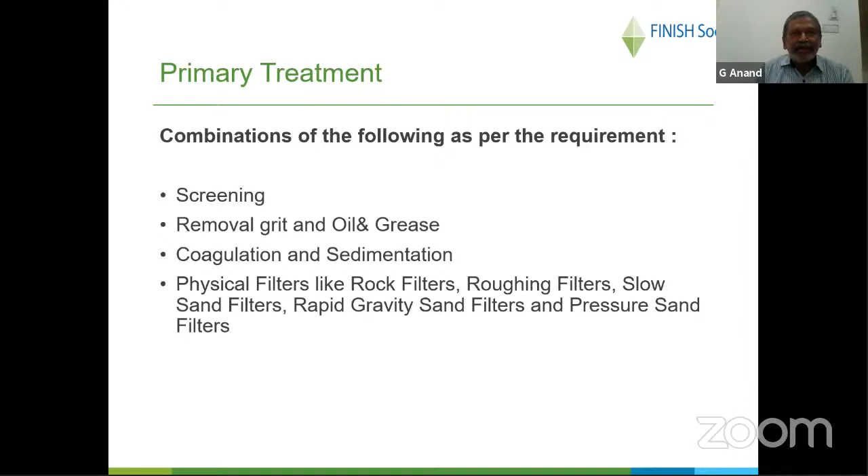Secondary treatments can be chemical, biological, and natural. We try to focus more on natural systems. Natural means it is actually an engineered mimic of a natural treatment system, like constructed wetlands, nutrient film technology, and the like. But the core focus which we apply is on usage of constructed wetlands.

And for using constructed wetlands, there are several reasons, because it is basically a solar powered treatment system. It is just like any mechanized treatment system—it has all the components, all the processes—but it doesn't require external energy by means of electricity. The energy required for plants to absorb oxygen from the atmosphere and send it through the roots is made available by the plants themselves by processing solar energy. So I call a constructed wetland a solar powered sewage treatment system.

Tertiary treatment, again, is end-use specific. We may require sedimentation, flotation, sometimes disinfection, sometimes dechlorination, and sometimes additional filtration with pressure sand filters or whatever. Again, it's all end-use specific.

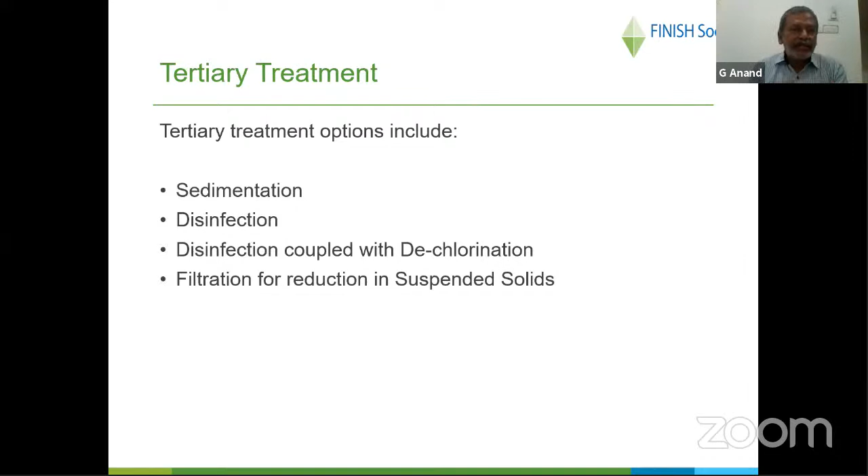Grey water with high organic load can come from industrial effluents, fugitive effluents from industries using organic raw materials, human feces through fugitive discharges from toilets or overflows from septic tanks, and animal waste—you always find animal waste entering drains in small villages. And sometimes, due to poor solid waste management in the local body, some solid waste too may reach the drain through mismanagement. All these things add to the organic load of the grey water, reflected in terms of BOD and COD.

Treatment can be just for disposal in land or a water body. Second is value addition, for processing and selling it to make it a means of revenue. And then you can have indirect benefit to society, not necessarily to the investor, but to the society at large. And sometimes you have to.

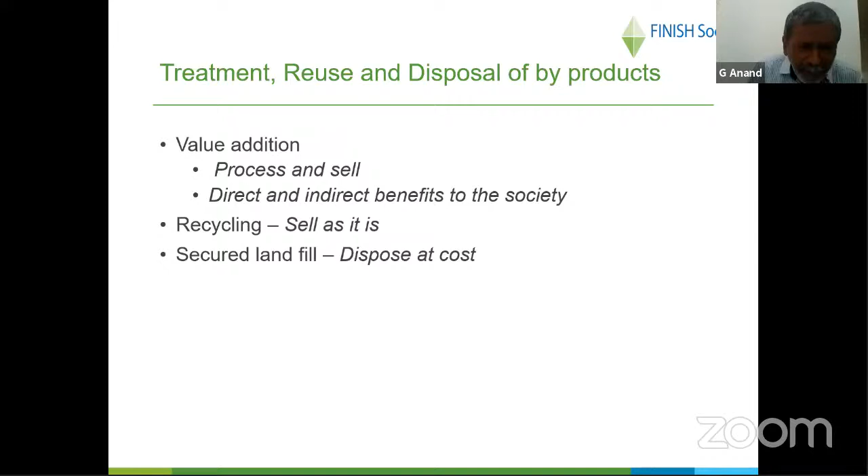Finish, after the initial decade in sanitation—wash, school sanitation, capacity building, and all those things—has forayed into liquid waste management. They started with small systems in small villages and expanded into major treatment systems. One of the most important treatment plants which Finish is consultant to is a lake rejuvenation project in Chennai, south of Chennai.

It is Lake Sembakkam, which occupies an area of 61 hectares, receiving effluents of various types through 22 inlets around the town. The total quantity of effluent is 7 million liters per day. In order to treat those effluents, we have a combined system which uses a combination of technologies.

It has sedimentation, it has an aerated lagoon, it also has a horizontal flow, subsurface flow constructed wetland. This constructed wetland, which we are putting up there, is the second largest constructed wetland in the world, occupying an area of 28,000 square meters. And we are doing this without acquisition of land from outside.

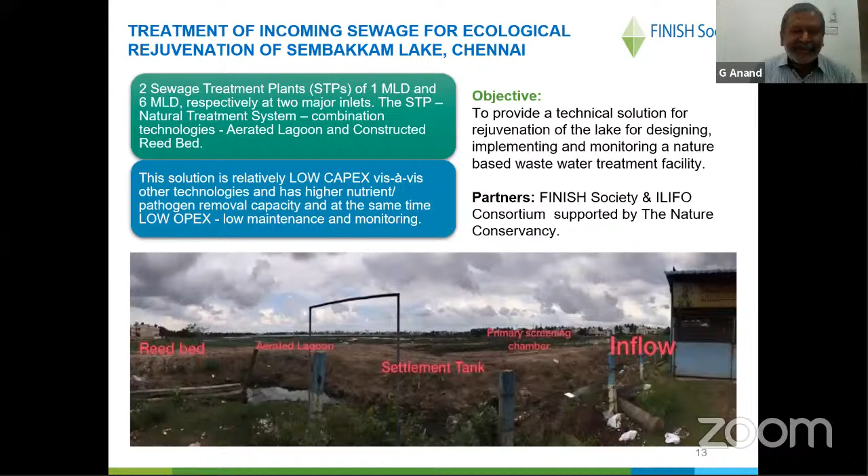We had to insert a mechanized system also in the Gaibsagar treatment system, because it was receiving industrial effluents using some raw organic material in the industrial estates. So we had to insert an MBBR into the system, over and above our routine primary treatment and the constructed wetland at the end.

So I have tried to keep it as brief as possible because time is running out. We have exceeded the time.

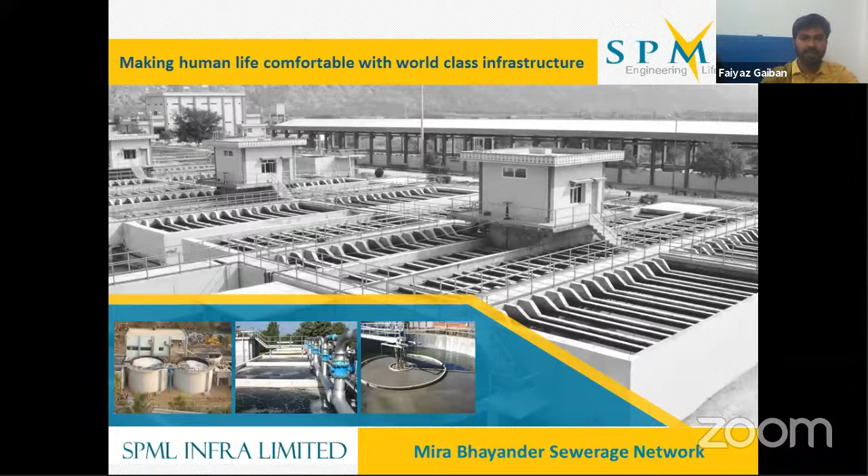Moving onwards, this is a brief on the project related to the comprehensive underground sewerage network in Mira Bhayander, including operation and maintenance. As you can see, this is the Mira Bhayandar area location, situated in the northeast area of Mumbai suburban.

During the course of execution, there were so many challenges we encountered. The Mira Bhayander area is surrounded by creek from three sides, so the land is majorly land filled up, a proportion of reclamation land. Previously, septic tank toilets were used throughout the city. The main roads of the city had open gutters for almost 170 to 190 kilometers, collecting and carrying sewage from individual houses. There was no sewage collection or treatment plants existing for the million population before these projects.

The sewage disposal system comprised septic tanks and surface gutters, carrying sewage to the old sewage treatment plants by open channels, which was a highly polluted and unhealthy condition. The direct discharge into inland water bodies led to widespread water contamination and distorted aquatic flora and fauna in the area.

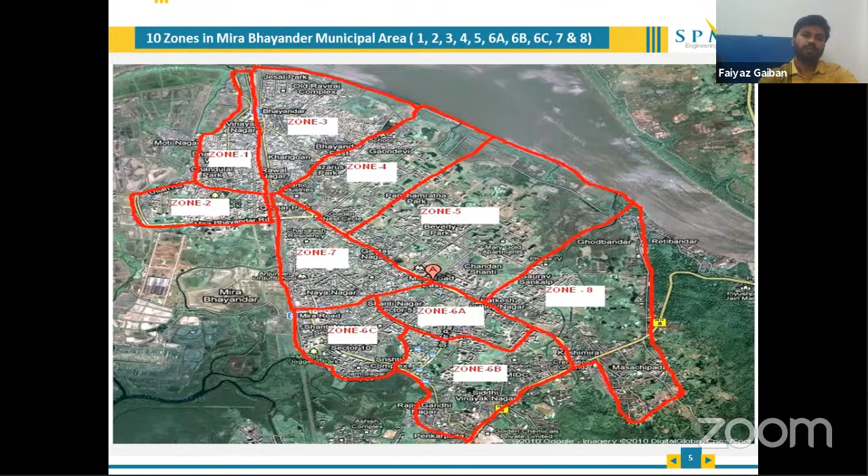All STPs were designed for SCADA-based operation and management, and monitored in control from one master room control. The project is also executed with specialized shoring material, which is brought from Germany, which is SBH MS shoring.

Then the raw sewage is pumped through a submersible pump to the sewage treatment plants, and with the help of MBBR technology, we are treating all 115 MLD of sewage, and the treated water is being disposed into nearby creeks. The entire collection system length we have executed in Mira Bhayander is 92 kilometers, and all STPs are carrying sewage from various locations, industries, and other sources.

There are some social benefits, which include environmental pollution being under control, disposal of treated water reducing stagnation in the drains, and insects will be reduced significantly, and so on.

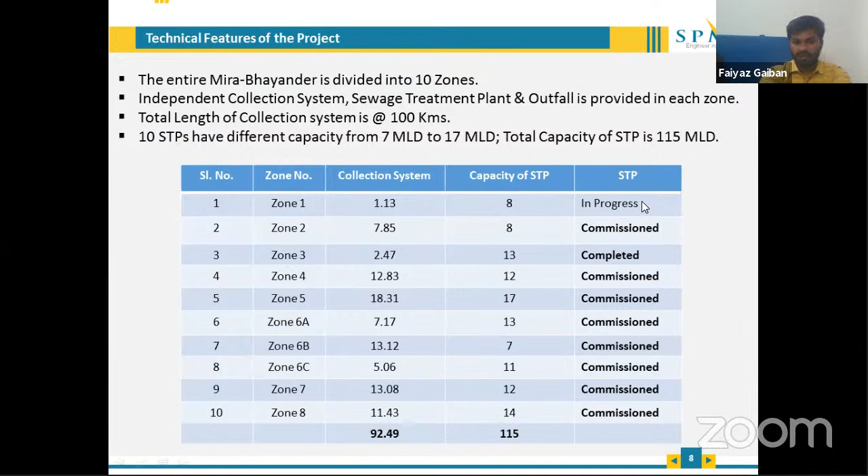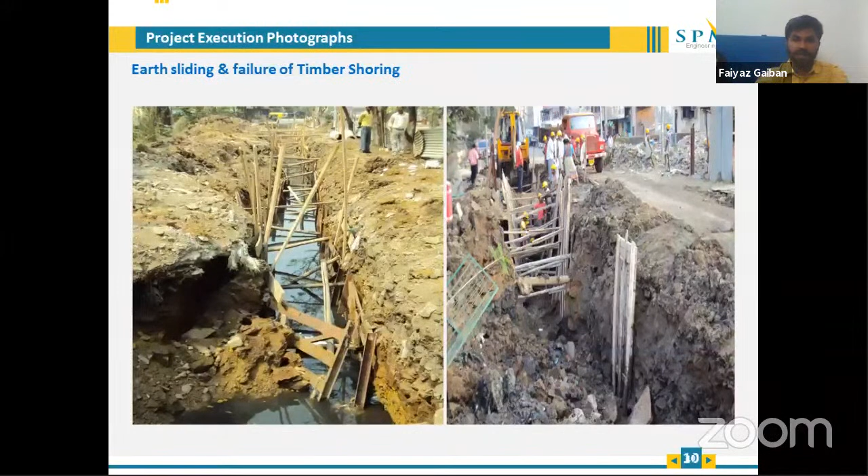There are some technical aspects where there was a failure of timber shoring while executing in shallow depth excavation. To counter this, we brought SBH shoring from Germany, which is a very safe method of execution for the pipeline work. So there are some advantages of using SBH steel MS shoring over the timber shoring.

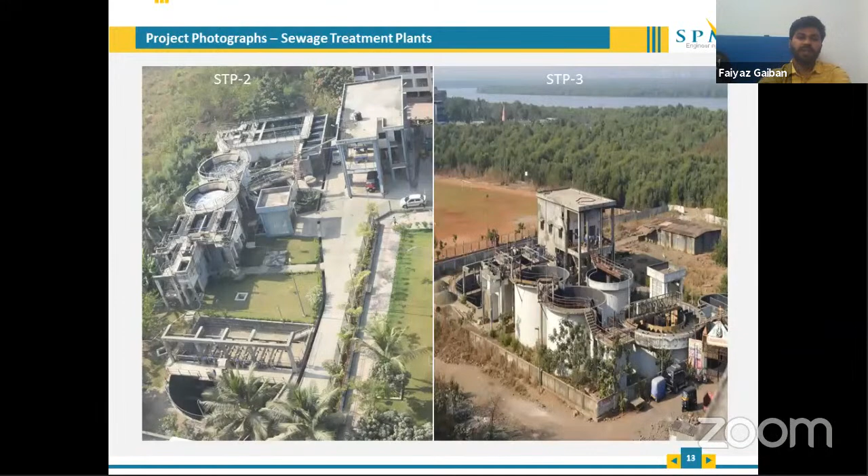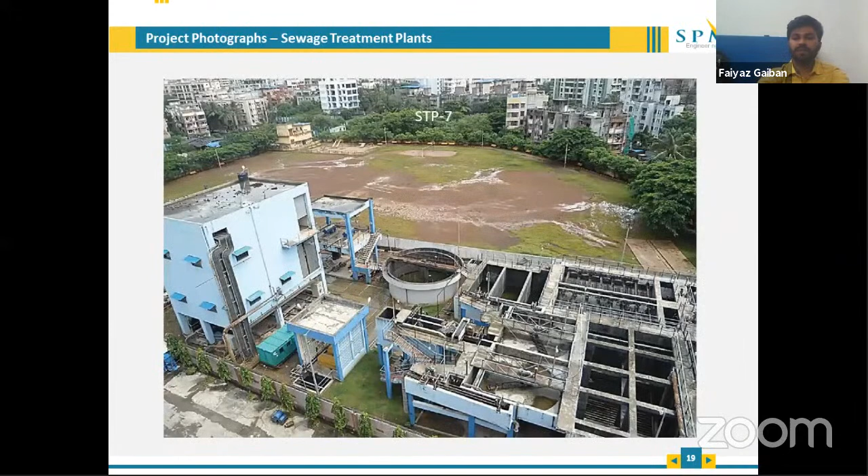Moving on to next, these are the completed sites: zone 2 STP, STP3, STP7. All STPs are currently working and under operation and maintenance since 2015. So total per day 7,000 kg of dry sludge is being generated, and it is being disposed into the reclamation area, which is provided by the Mira Bhayandar Corporation area.

This is from our side.